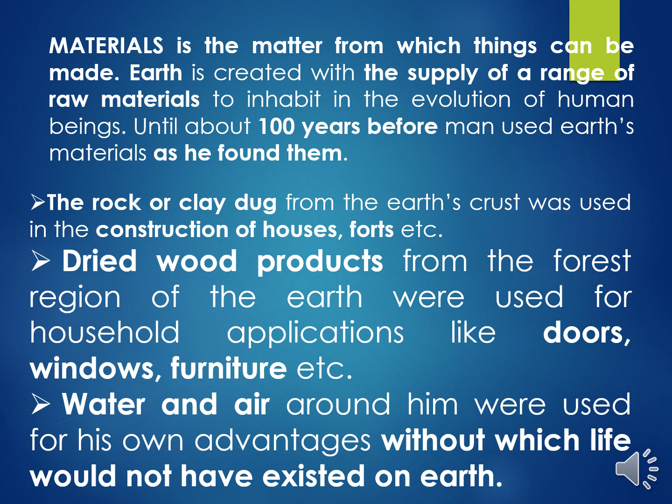Now, materials are used after designing or engineering. Materials and the science of materials and the engineering of materials have come up together as a new branch in science called as material science. Well, what is material science? Material science is an interdisciplinary field concerned with the understanding and application of the properties of matter.

Material scientists study the connection between the structure of materials, their properties, processing methods, and its preferences on applications. It includes various areas of science like chemistry, biology, biotechnology, and engineering, especially electrical engineering. Material science is the upcoming field of science where various engineering methods of new materials are used in designing and discovery of new materials, particularly in solids.

Have you ever thought what the material these TV sets, computers, suspension bridges, oil refineries, rocket propulsion, nuclear reactors, supersonic transport and many other devices are made up of? I even saw one building, a huge auditorium built of a building material which can be recycled.

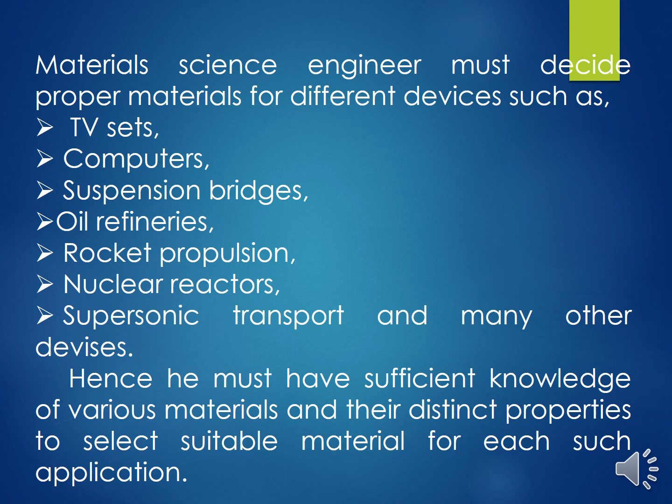Now, you have got organic LEDs which are very cheap in cost, and are generated in large scale. Thus, material science has given us new materials, and it is a promising field for greater research.

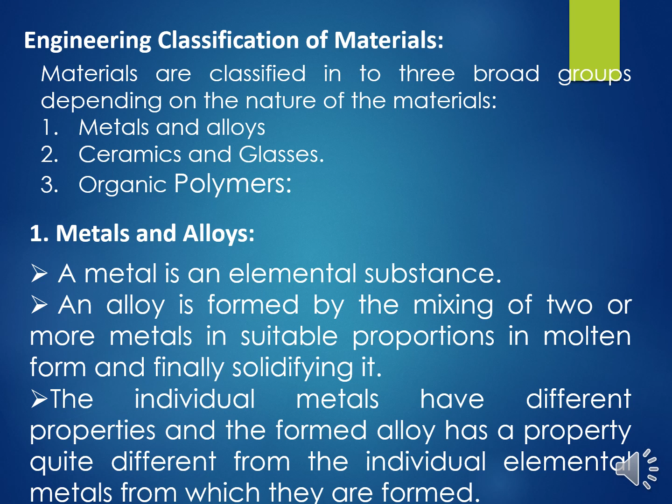However, the alloys are metals made up of combining two or more metallic elements. An alloy is formed by mixing of two or more metals in suitable proportions in molten form, and finally they are solidified. Individual metals have different properties, and when they are molded to form an alloy, they have a property quite different from the individual elemental metals from which they are formed.

Metals and alloys find important engineering applications because of these important properties or characteristics. They are hardness, strength, rigidity, formability, machinability, weldability, conductivity, both electrical and thermal, and dimensional stability.

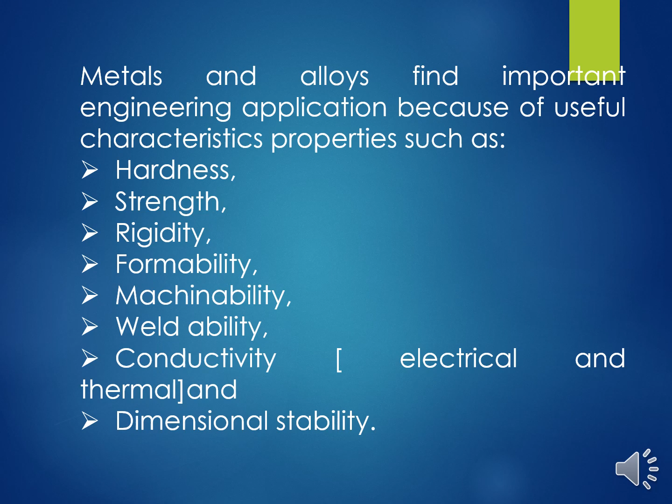Ceramics are the articles made from clay and hardened by heat. Ceramics are compounds of metallic and non-metallic elements. Hence, there are a large number of materials which fall into this group. Examples are metallic compounds, rocks, minerals, glass fiber, and all forms of clays or ceramic substances.

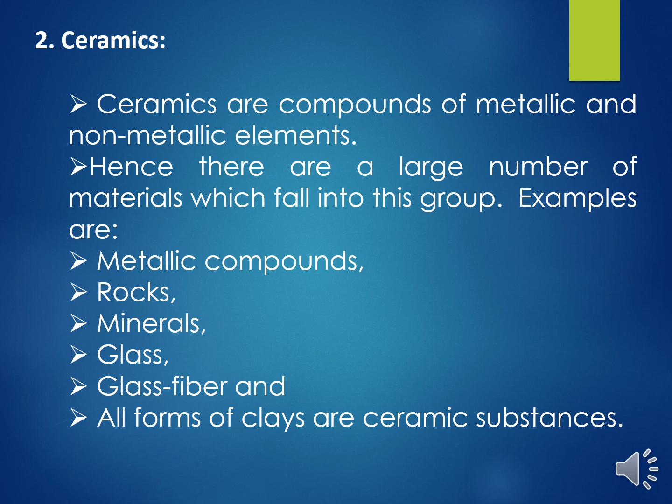Now let's know about organic polymers. Organic polymers are the organic materials derived directly from carbon. They usually consist of carbon combined with hydrogen, oxygen, or other non-metallic substances. The structure of these materials is fairly complex. Some examples of commonly used organic engineering materials are plastics and synthetic rubber.

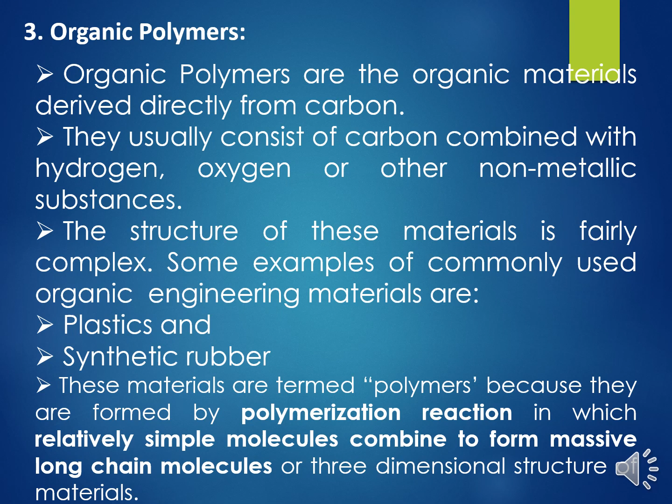Now these materials are termed polymers because they are formed by polymerization reaction in which relatively simple molecules combine to form massive long chain molecules or three-dimensional structure of materials.

Now let's know about composites. Composites are a class of materials formed by the combination of any of the two of three materials: metals, ceramics, and polymers. There are many composites. First one is formed by metals or alloys and ceramics. They are combined to form composite materials like steel reinforced concrete.

The second one, metals or alloys are mixed with organic polymers and combined to form composite materials. For example, vinyl coated steel. And ceramics and organic polymers are also combined to form composites. For example, fiber reinforced plastics and carbon reinforced rubber.

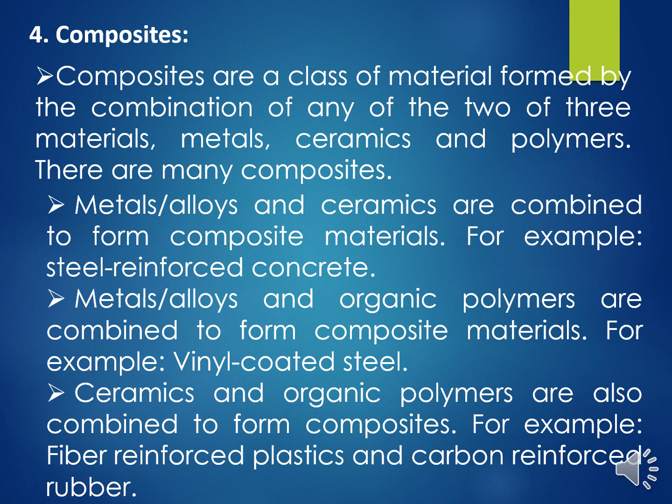Now these materials, in order to engineer them to form new fabricated materials, need certain requirements. The study of engineering materials is for the purpose of using them in some practical applications. The practical applications of the engineering materials depend upon a thorough knowledge of their particular properties under a wide range of conditions like temperature, humidity, etc.

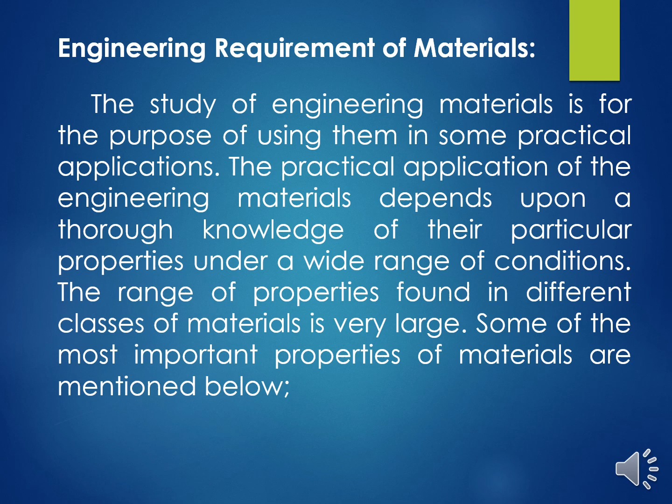The range of properties found in different classes of materials is very large. Some of the most important properties of materials are mentioned below. The first one is mechanical properties. In mechanical properties, we need to know tensile strength of a material. It is the ability of a material to withstand tensile loads without breaking.

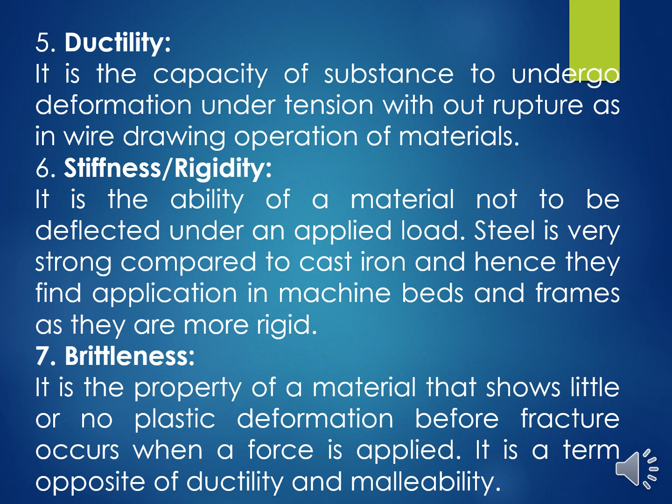Now comes the electrical properties. They are conductivity, resistivity, dielectric permittivity, dielectric strength. And the magnetic properties are permeability, coercive force, hysteresis. Thermal properties are specific heat, thermal expansion, conductivity. All these should be studied for the materials.

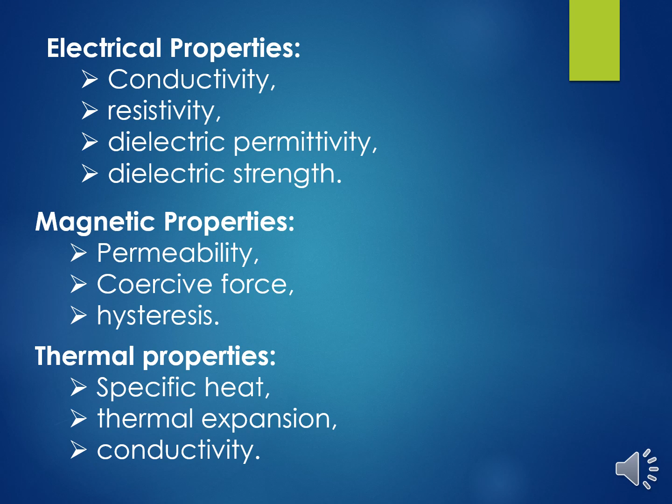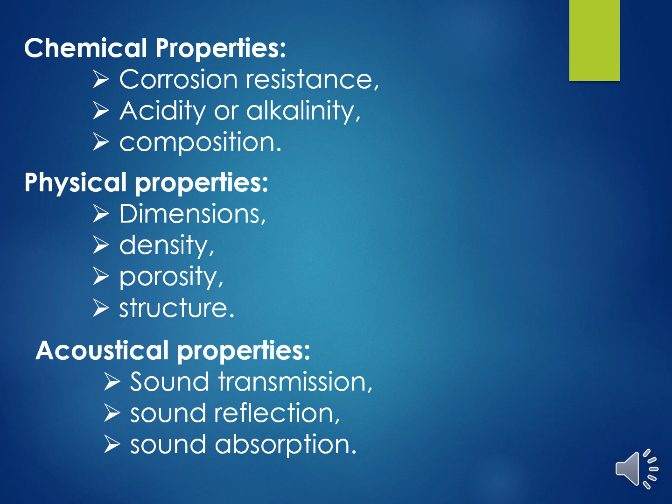Now the chemical properties to be studied are corrosion resistance, acidity or alkalinity, composition. Physical properties are dimensions, density, porosity, structure. Acoustical properties are sound transmission, sound reflection, sound absorption. Now we have got optical properties or birefringence properties, which are color, light transmission, light reflection, and light absorption.

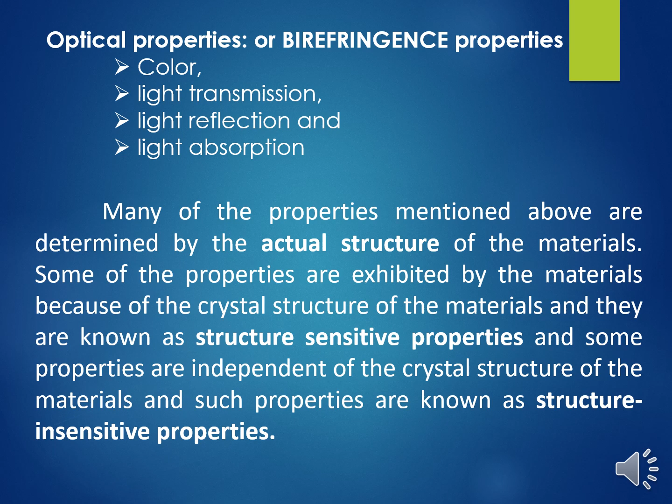Many of the properties mentioned above are determined by the actual structure of the materials. Some of the properties are exhibited by the materials because of the crystal structure of the materials, and they are known as structure-sensitive properties, and some properties are independent of the crystal structure of the materials, and such properties are known as structure-insensitive properties.

Now let us know about crystalline, polycrystalline and non-crystalline states of materials. You know that solids are mainly classified into crystalline and amorphous. Well, what are crystalline materials? A solid is said to be in crystalline state if the constituent particles, those are atoms or ions or molecules, are arranged in a three-dimensional periodic manner on lattice, or if it has a reticular structure.

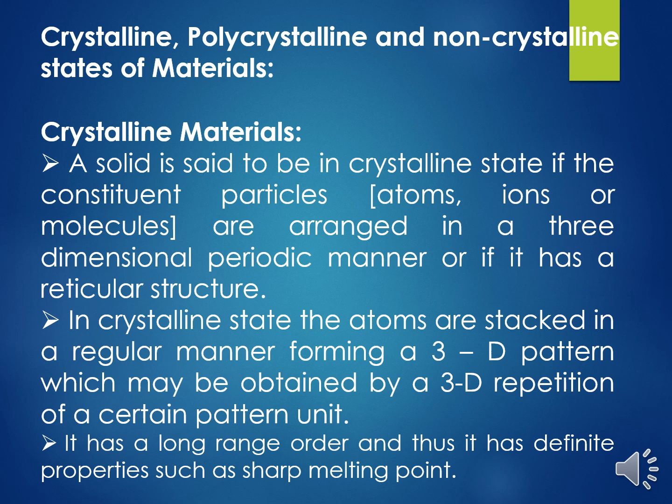Now, in crystalline state atoms are stacked in a regular manner, forming a 3D pattern which may be obtained by a 3D repetition of a certain pattern unit. It has a long range order and thus it has definite properties such as sharp melting point. When the crystal grows under constant environment, the external geometrical shape of the crystal often remains unchanged. Thus, the shape is a consequence of the internal arrangement of constituent particles.

The ideal crystalline material has an infinite 3D repetition of identical units, which may be atoms or molecules. Examples of crystalline materials are all ionic solids, most covalent solids are crystalline, and all metallic solids are normally crystalline.

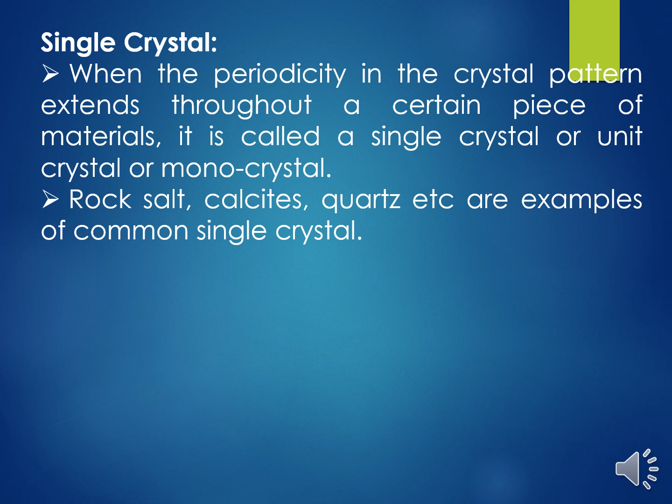Now let's know about single crystal. When the periodicity in the crystal pattern extends throughout a certain piece of material, it is called a single crystal or unit crystal or monocrystal. Single crystals can be grown in the laboratory. Examples: rock salt, calcite, or quartz.

Now, polycrystalline solids. A solid is said to be polycrystalline if the periodicity in the crystal is interrupted at so-called grain boundaries. In this case, the size of the crystallites is smaller than the size of the pattern unit, which forms a periodicity. The size of the grain in which the structure is periodic may vary from macroscopic dimension to few angstroms. In general, the grains in such a solid are not related in shape to the crystal structure, the surface being random in shape rather than having well-defined crystal planes.

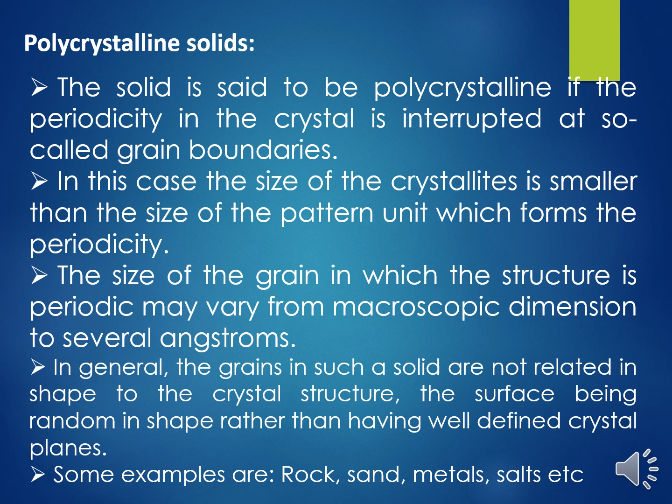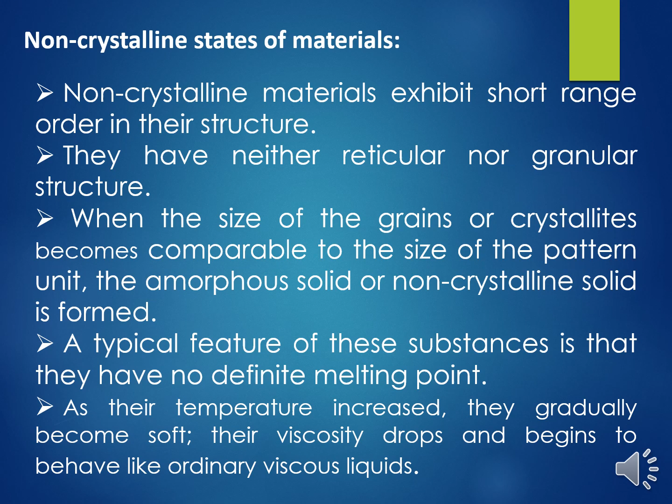Now, in non-crystalline states of materials, non-crystalline materials exhibit short-range order in the structure. They have neither reticular nor granular structure. When the size of the grains or crystallites becomes comparable to the size of the pattern unit, the amorphous solid or non-crystalline solid is formed. A typical feature of these substances is that they have no definite melting point; in non-crystalline material, as the temperature is increased, they gradually become soft, their viscosity drops and they begin to behave like ordinary viscous liquids.

Now let us distinguish between crystalline and non-crystalline states. Crystalline materials have long-range order that extends throughout the material, and hence they show a characteristic geometry. Examples: metals, ionic solids. However, non-crystalline material has no long-range order, and hence does not show characteristic geometry. Example: rock.

Second difference is crystalline materials are formed when the material in liquid state is cooled very slowly at its melting point. In other words, they have sharp melting point. However, non-crystalline materials are formed when the material in the liquid state is cooled very fast at its melting point. In other words, they have no definite melting point.

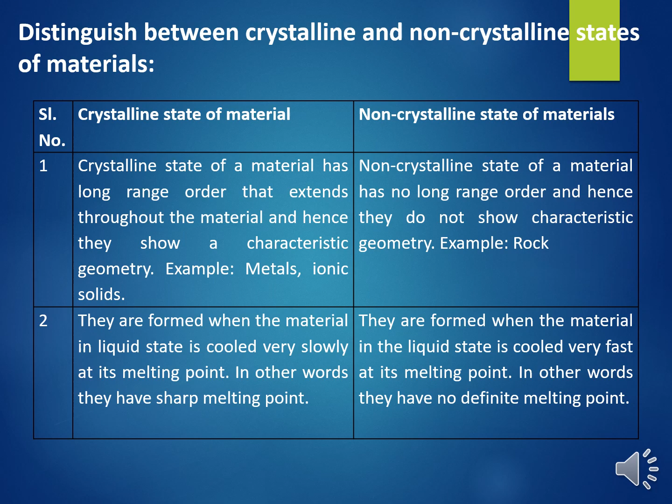The third difference is the cooling curve of crystalline materials is not smooth but has a region where the temperature remains constant when the change of state occurs. You see the flattened part there. In non-crystalline, the cooling curve is smooth when the change of state occurs. The fourth difference is crystalline material is formed by 3D repetition of a pattern unit, however in non-crystalline the pattern unit has short range order.

The fifth difference is crystalline solids show anisotropic property. This means the properties such as electrical, thermal conductivity, refractive index, mechanical strength, coefficient of thermal expansion, etc. are different in different directions. But in non-crystalline materials, all these properties are same in all directions.

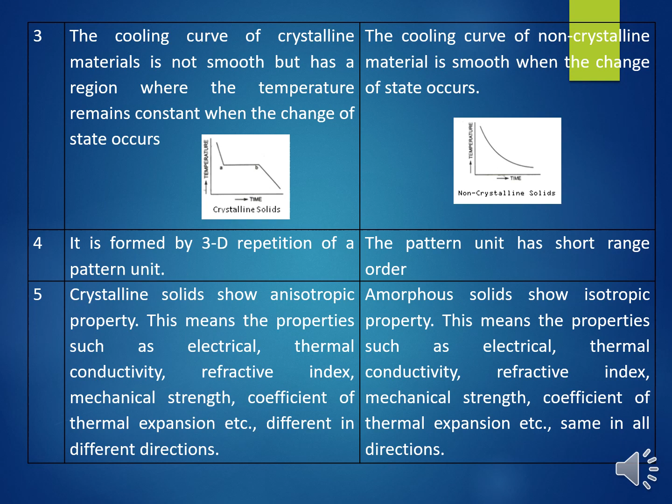The sixth difference is crystalline solids give a clean cleavage when cut with a sharp edge. However, amorphous solids give irregular cut due to conchoidal fracture on cutting with a sharp edge tool. The seventh one is covalent solids formed by slow cooling process are crystalline. However, covalent solids formed by rapid cooling process usually form amorphous solids.

Thus, new materials are fabricated, their structures and properties are studied, they are used, and they are designed to form new materials which can be used for greater purposes. The field is open and research is going on in order to find or design more and more new materials. You too can do that.